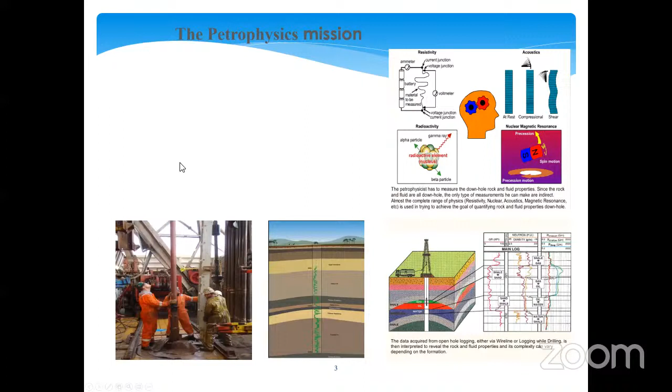So if you want to be a petrophysicist, or you're already in the business, this will be a refresher for you. For those who do not have an idea, the mission of petrophysics is to identify and quantify hydrocarbon resources in the subsurface, and also to be able to know the kind of fluid type we have, and then dealing with the rock and fluid properties in the formation.

Now, we do this over the life cycle of the field. So that's the objective of petrophysics. Because we cannot access our hydrocarbon directly, we do not have the intellect to go subsurface, we have to lower downhole tools, like you can see from what you have on the screen.

So we can only lower tools into the bottom hole. When you lower the tools into the bottom hole, it's going to send you some inferred data. These inferred data are then presented in log form. It is the responsibility of the petrophysicist to do the evaluation.

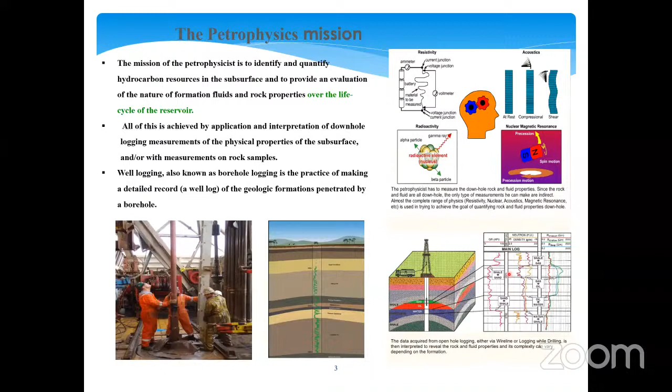And in doing all this, there are specific kinds of data in general context that we look at. That leads us to the fundamentals of petrophysics. What are the specific data that we are looking out for in general?

We want to assess the mud log. We do this in integration with the geologists on the wellsite. We also have core analysis on the wellsite, who also collaborate and then deliver value.

Open hole logs are taken as at when the well is being drilled. It is the role of the petrophysicist to do the interpretations and to be able to give value to the operating company or to the asset owner.

Now, in this context for today, we'll be talking more around when the well has been completed and when production has already begun. So I'll be talking more around cased hole logs, about production, how we manage our production, how we can deliver, and how we can extend the life of our producing assets.

So in a nutshell, for the basics, what are we looking at?

We're looking at the contacts and then the saturation. Do we have oil water contact, gas water contact, or gas oil contact? These are the things to look at. What is the value for our saturations at initial condition? And after we have produced our reservoir with time, what are we seeing as a saturation number? Is it declining or does it remain at original? These are the scenarios we play around.

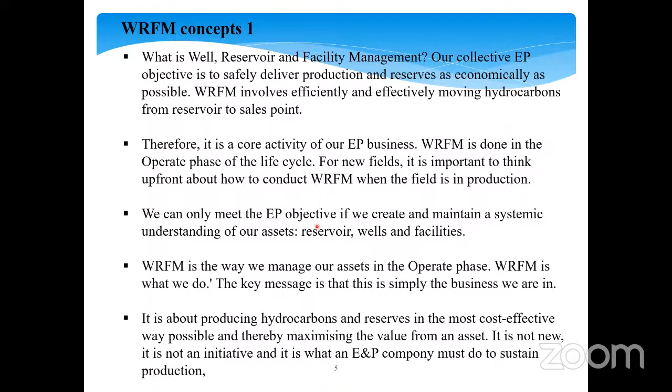So in doing this, we must look at cost-effective manner as much as possible in maximizing our assets. So it is not a new idea, not a new initiative. It is what companies must do to sustain production. Why do we have to sustain production? If you do not manage your production, you are likely going to be out of business and you will go bankrupt.

You've gotten the reservoir, you put your facilities in place, and you projected for maybe 100 years production, 50 years production, 30 years production, based on your forecast. You want to ensure continuous production. It will then mean that your well, your reservoir, your facility needs to be built into your general understanding and concepts in order to form an uninterrupted flow. So we need to build a general understanding of how our reservoir and wells, as well as our facilities, are going to perform.

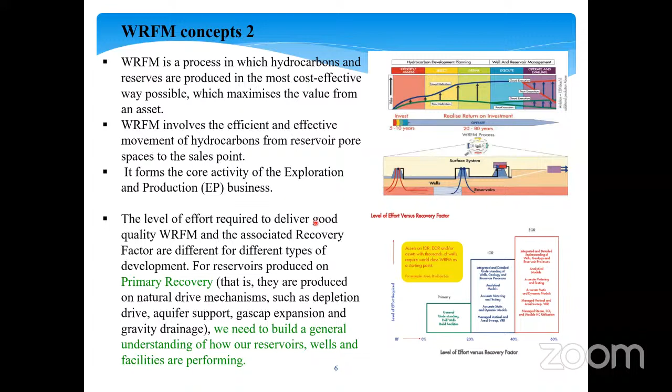You need to know your subsurface pressure. You need to know your surface pressure, your inlet pressure, your outlet pressure. What's happening in your aquifer, and what challenges you encounter. You cannot do this without getting or acquiring the needed data in a continuous manner or in a lapse time manner. That is where petrophysics has a significant role to play.

So playing back a little, from when you start your exploration, you start putting in money into a project. As you put in money, you are acquiring data. You are estimating your volume. You are appraising your field using data. When you start your production, you want to have a payout, and also for further development purposes, because you want to extend the life of your field.

What does the petrophysicist do? We continue to acquire data. We have our initial field development plan based on known data. As you begin to produce, the dynamics - what you know at initial, from initial data - things could begin to change. It then becomes necessary to continue to manage a health check on your well, on your reservoir, as well as other facilities in your integrated system, up until when you get to the abandonment phase. It is in line with this that we build a static model.

So we have a first-hand understanding. We then built a dynamic model. What do we need to build the dynamic model? From our static model, we have initial open hole log data that we use to derive petrophysical properties, which are imputed into our reservoir model. Thereafter, we go into dynamic model. What kind of tools do we need to be able to acquire the information to manage our reservoir? At that point, we are into dynamic model.

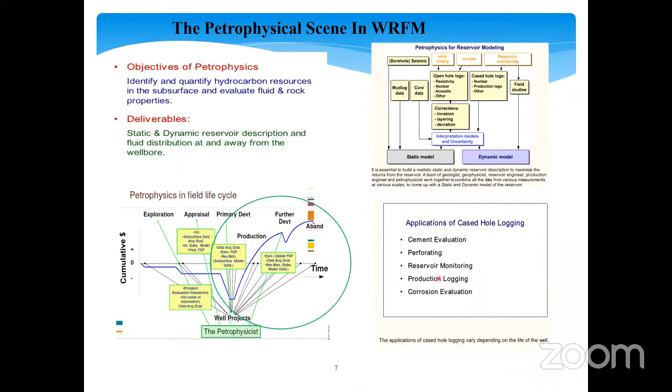In building this model, you don't work in a silo, you work in an integrated team with other technical professionals. So some of the things I'll be talking about in this presentation include cement evaluation, perforation, reservoir monitoring, production logging, and corrosion. These are part of the tools that petrophysicists use to manage our wells, manage our reservoir, and manage our facility, and they form the bedrock for our WRFM petrophysical data.

In WRFM, we are thinking about production, not just production. How do we continue to produce without deferment? How do we continue to add capacity to our facility so we don't have downtime? So the accuracy and understanding of our basic data is what will help us build a robust model that will last the test of time and continue to calibrate until we sweat out our assets.

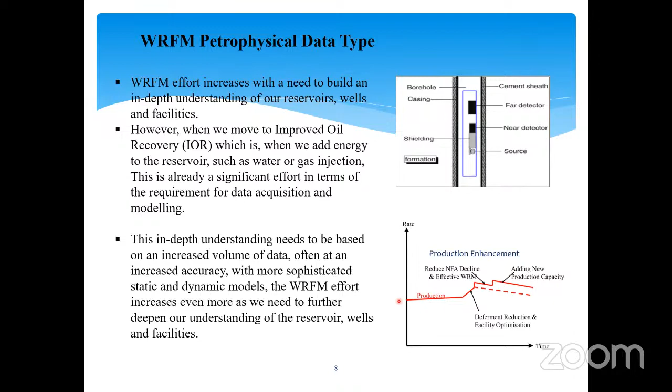Some of these tools and data we'll be acquiring are very basic, which I'm going to run through. I'll be talking about production logging, what it's meant for, and at what point do we deploy production tools. I'll also be talking about reservoir monitoring logs, cement evaluation, casing integrity, and of course geomechanical data.

Our subsurface is being challenged as we continue to produce. There will be loss in terms of pressure management of our reservoir. Of course, there could be slight chances that we could be having issues around subsidence and compaction. So in a nutshell, I'm going to talk around all this.

So we want to know our casing condition. Is our well still healthy? What is the reservoir condition? Are we producing H2S from the reservoir? If we are having H2S being produced, is it affecting our tubulars? If it's affecting our tubulars, the chances are that we'll be having corrosion. It then means that we need tools to monitor our wells.

Cement condition - have we done cement jobs in the past? Where are we today, and how effective was your previous cement work? Are we having issues around cement channeling? Are we having issues around hydrocarbon bypassing the point of production into a thief zone? Is the saturation being impacted on? What's the current lithology in our formation? Porosity - we also want to know our formation strength.

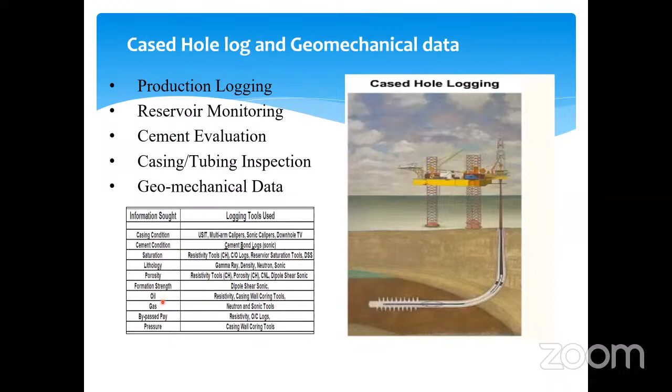Are we having our oil depleted, gas cap formation? All that is what we need to talk about in a nutshell, and then I will give you the opportunity to ask your question like I earlier said.

So production logging - why are we doing production logging? We are majorly concerned about what happened within the tubular. We want to be able to have a clear differentiation as fluid is coming into the tubular.

Based on forecast, are we having the required inlet and outlet from your wellhead? It could be that there is a no flow condition, possible low performance. It could also be that while you're expecting oil production, you're experiencing excess water production. It could also be that instead of gas production, you are experiencing water production, or in your reservoir that is targeted for oil production, you are experiencing high gas production. Where is the gas coming from? These are the things you'll be able to use production logs to assess.

What kind of fluid is flowing? Of course, that leads us to having capacitance. The capacitance of different fluids is different, so with that we'll be able to know the type of inflow. At what rate are we having this flow? Is it as predicted, or is there a change?

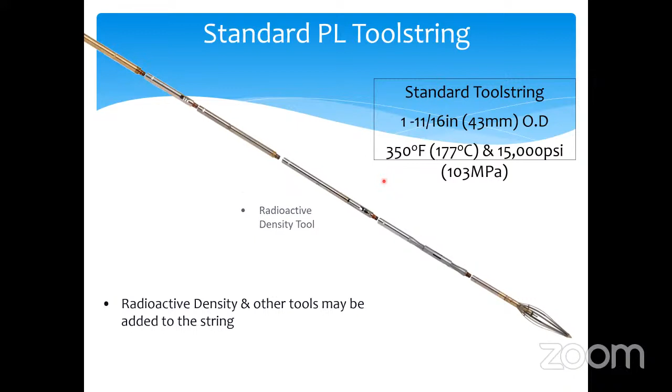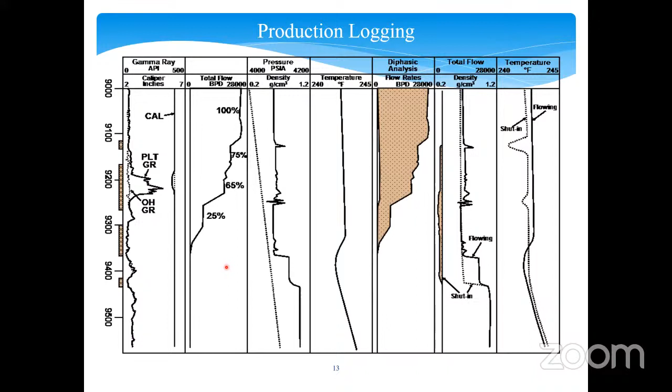Other tools can be added into our standard tools to achieve healthy results. This is just a play out from a production logging tool. We derive data such that we've done some perforations, and we continue to monitor production using the production logging tool, which gives us a clear indication of the percentage of fluid that comes in from different perforation inlets. It will also enable us to know the interval that is bringing in water for a possible shutout.

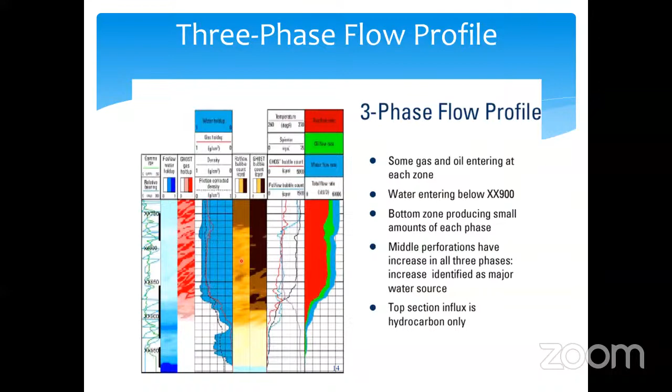This can also be monitored in a three-phase dimension, such that it could tell us the kind of fluid production, oil, water, or gas, and at what ratio they are being produced.

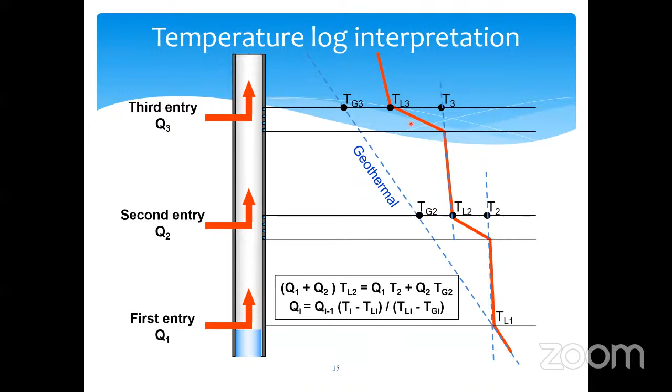Other tools that we use to monitor our well, embedded into the production tool, is the temperature log. Temperature variation is supposed to be geothermal, meaning increasing with depth. Points where there is a deviation from the original geothermal gradient is an indication that there is an inlet of fluid. So these points can be noted as intervals where there is a possible leak and a possible remedial action, right?

I take you also to another tool that we deploy as Petrophysics in managing our wells and reservoir: the reservoir monitoring logs. From initial production, you begin to produce your well dry, meaning you are producing dry crude. Over time, you begin to monitor your well and discover that water has begun to rise against initial expectation. Where is this water coming from? You cannot go into the well, so it is then expected that we run some tools. These tools are being run.

High energy neutrons are pulsed into the formation. Depending on the type of formation, if it is highly saline, we deploy the pulse neutron capture. And when we have very low salinity, we deploy the pulse neutron spectroscopy, otherwise known as carbon oxygen log.

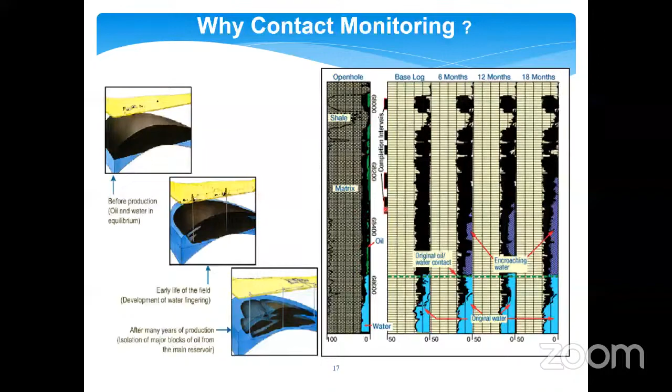This is a typical case of our reservoir under initial condition. Over the years, as production continues, in early life of the well, we begin to see depleted zones and non-depleted zones. The question is, if you have your perforation at the depleted interval, it then becomes imperative to have a change in your point of opening into the formation in order to cut down the water inflow into your well. It is part of what we do.

Don't forget, what you take into account is what is the average cost of a well today. If you know the average cost of a well, you will then know the value in maximizing production through that well that has been drilled and completed.

Other things we don't want to play about is our cement evaluation. We do our cement evaluation to be able to secure our well and ensure that it is integral, because we do not want hydrocarbon to come to the surface outside the conduit that we have prepared. So to reduce this risk of unintentional release of hydrocarbon to surface as low as reasonably practicable, we do very serious cement evaluation and ensure that our cement work is integral.

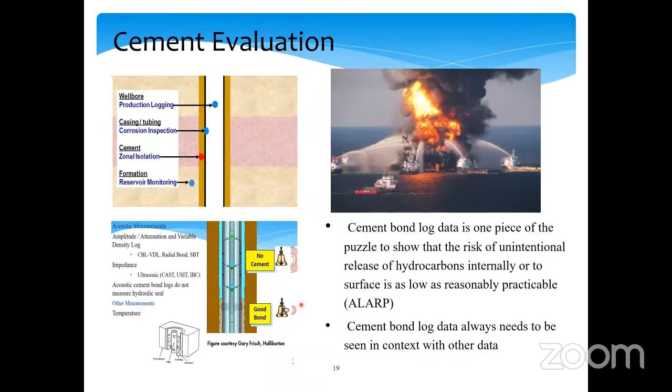I will not labor you much about how the CBL operates. They are in different modes and different kinds. It's just a case of looking at cement evaluation. If you have a bad cement bond, the amplitude between the well will be high, meaning that there is no cement, right? And when the cement is okay, is good, it has served the purpose of isolation. It will give a very low amplitude, indicated with what you're seeing.

So there are other objectives for the cement, which I've just highlighted. The most important thing is that we want to ensure that we do further drilling when drilling, and then of course manage our production effectively. Of course, you have your production tubing, right?

And if that pipe is in place, you do not want the pipe to get bad. So you also need to be checking for corrosion. You do the cement and ensure that fluid from the formation is not having interaction with your tubing.

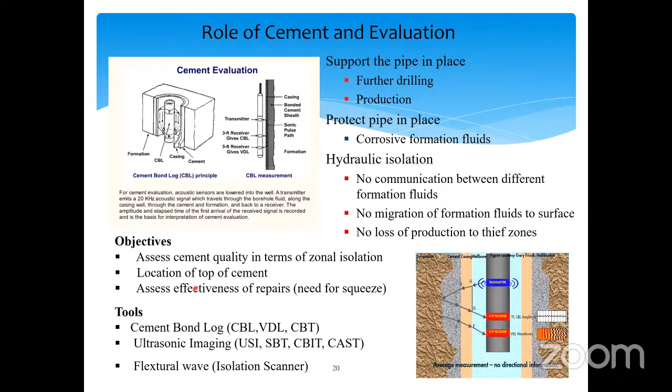It also helps to do hydraulic isolation, meaning fluid does not move from one zone to another. So the objective is zonal isolation. We want to locate the top of cement and all that. If this has changed over time as a result of temperature and pressure effects, we still have a solution. We can do what is called remedial squeeze and get things sorted out by isolating the zones that have been compromised as a result of change in formation.

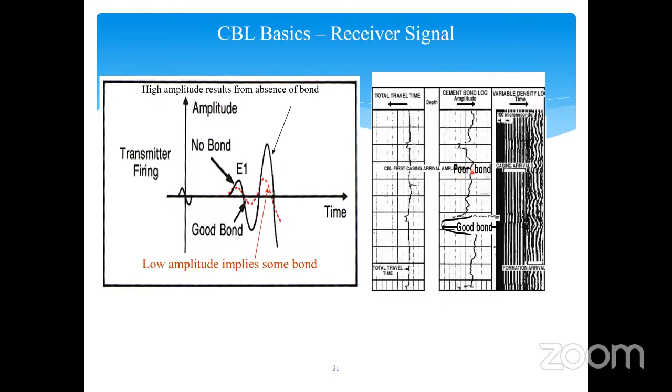So this is just a basic kind of log where you have a good bond because the amplitude is low, and it's the old vintage log. Then you have a poor bond when the amplitude is high. In present time, we run this type of ultrasonic image tool such that it gives you a 360 degree radial image of your well. With that, you'll be able to determine the angle or the points that are not properly cemented.

You can see an indication of top of cement, good cement, where you have this brown patch. Complete brown patches are good zones that have been completely cemented. However, like I said earlier, if you have a case of bad cement work, we can still do remedial squeeze. This is a case of a bad cement work that was done.

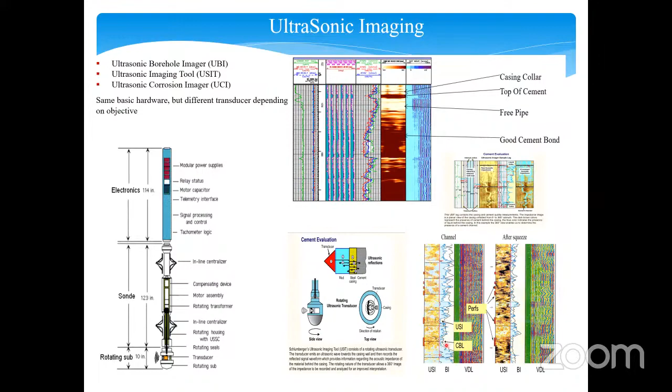The bond index is when a remedial cement work was done. So we also monitor corrosion. As petrophysicists, we monitor corrosion in our well.

If our wells are tubulars and even our pipes are corroded, maybe you've heard of non-destructive testing on pipelines. These are continuous checks that are being done to ensure that our pipes are integral.

Now, wireline evaluation. It is estimated that 1% of total operating costs of the petroleum industry could be saved by correct application of existing corrosion protection technology. So what do we do? Corrosion control is particularly cost-effective for deep or remote wells, those expected to have a long life, or for wells producing CO2 and H2S.

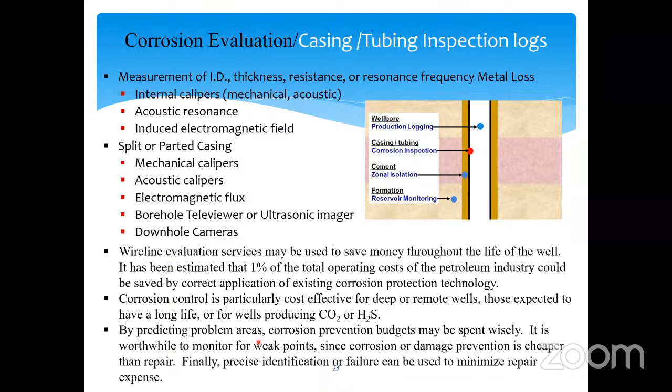So by predicting these problems around corrosion, we will be able to save the situation before we have a catastrophic failure. When we're able to identify failure, we can also minimize cost of repair. So this is what actually happens downhole.

You have your redox reaction actually taking place. You have part of your metal becoming the anode and the other one becoming the cathode, losing metal and gaining metal. These are not visible to the eyes, but our tool will tell us what is actually happening.

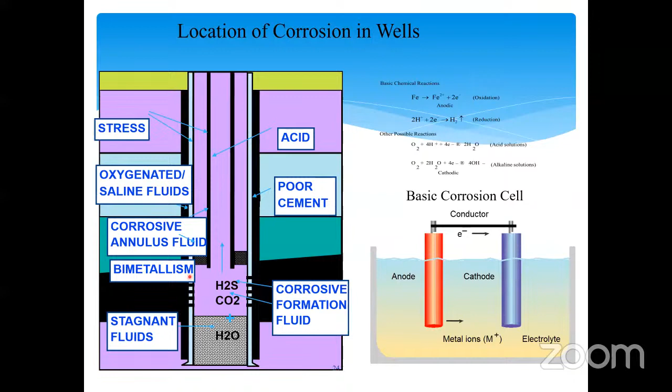From this schematic you see here, there is an attack of acid on our tubular. We have saline fluid, we have corrosive fluid, and we also have the effect of bimetallic change, meaning two metals increasing in temperature and pressure. They have different coefficients, which leads to different rates of expansion and contraction. So with that kind of activity taking place downhole, it could result in failure.

These are typical examples of failures that were detected by deploying petrophysical tools in our wells. This is a pipeline, or a tubular, that has actually been corroded. And here we have a case of catastrophic failure. If this was not detected early, it has already gone bad. But if this was not managed, of course, there will be spill in the environment.

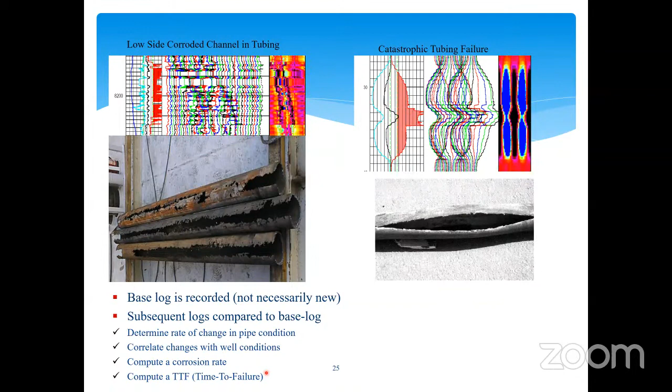So to avoid this type of situation, there is every need for us to have a base log data. And then subsequently, we acquire other logs at lapse time, program time, so we'll be able to determine the rate of failure and equally take measures to avert this type of situation.

So other cased hole logs that the petrophysicist acquires to be able to manage a reservoir are also like the cased hole formation testing, acquiring pressure data. We can also acquire resistivity log, density log, neutron log, all in a cased hole situation. There are also cases of monitoring subsidence.

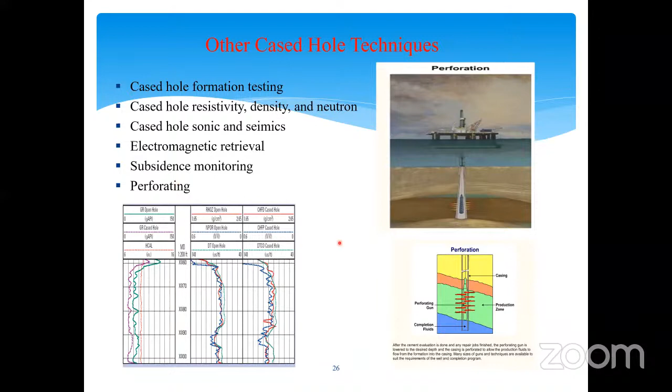I'll talk about that. And of course, if in the course of managing a reservoir we discover that there is an opportunity to enhance production, it is the role of the petrophysicist to determine the point at which we're going to carry out those perforation activities in order to gain more oil into the tank. So part of the solution that the petrophysicist provides is a geomechanical solution.

As you keep depleting your reservoir, there are chances that we'll have subsidence. We could also have some fault reactivation. There are places where they do water flooding and also produced water injection.

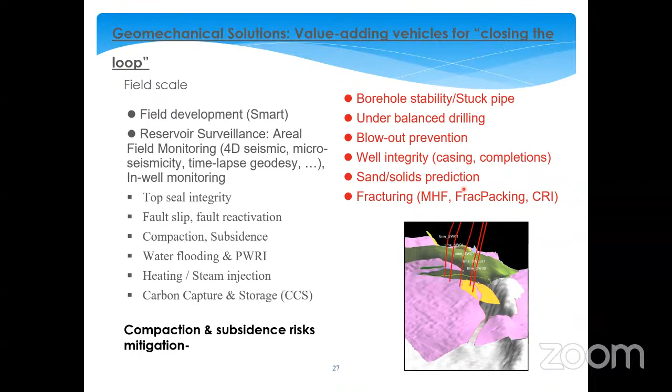We need to build models to have a good handle of our formation behavior and advise on modalities. We are not interested in producing oil alone; we are also interested in safeguarding our environment. So these are some of the roles that petrophysicists play in ensuring that we continue to optimize production.

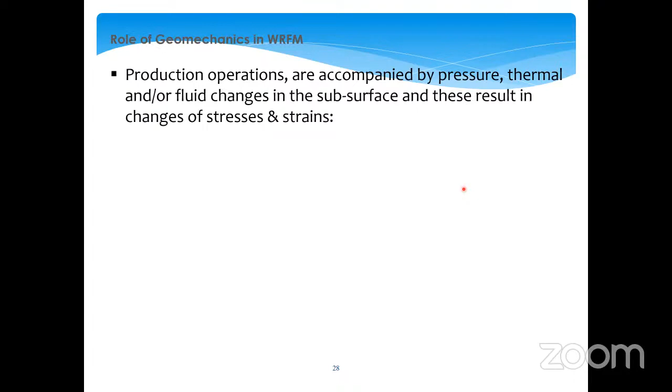Production operations are accompanied by pressure, thermal and fluid changes in the subsurface, and this results in changes of stress and strain. It then means we need to acquire data to know what the stress of the formation is and what the strain looks like.

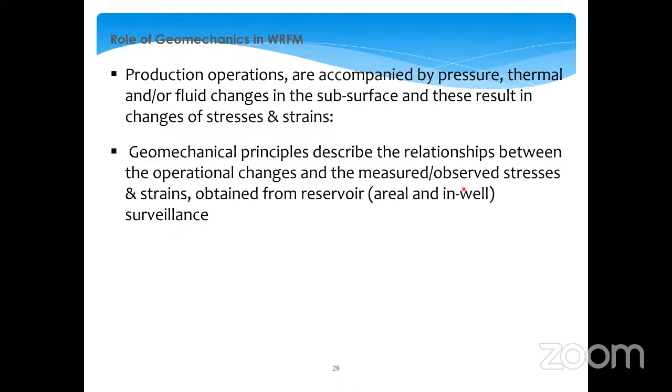These changes can only be monitored if we have good surveillance practice of acquiring data. So in conclusion, I would like to define the kind of integration in carrying out our WRFM practices that the petrophysicist does - what are the deliverables, the results, and the reward.

So here is the guy, the petrophysicist. He is a petroleum engineer. He relates with the well engineer, the drilling engineer, and the production guy. We carry out rigless well intervention activity and define the scope of how that activity will look, because the petrophysicist is the custodian of the log.

We also relate with the IT, information technology department. Of course the logs are stored in a database, so we need some IT applications to manage the logs. In terms of evaluating our logs, we also have some applications.

For example, we have TechLog projects. If you know, Cypher Crescent, for example, uses CEPAL, right? And also there are information sources that we can get. So we relate with the information technology team. Of course, there are many contracting firms involved in working with the petrophysicists - Baker Hughes, Halliburton, Schlumberger, and many others, right?

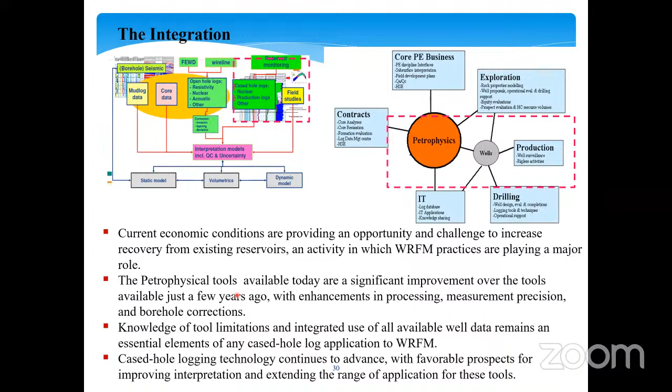So that is where we are. We continue to interpret and advance the course of our prospect by improving data in managing our dynamic model. The deliverables are quite enormous.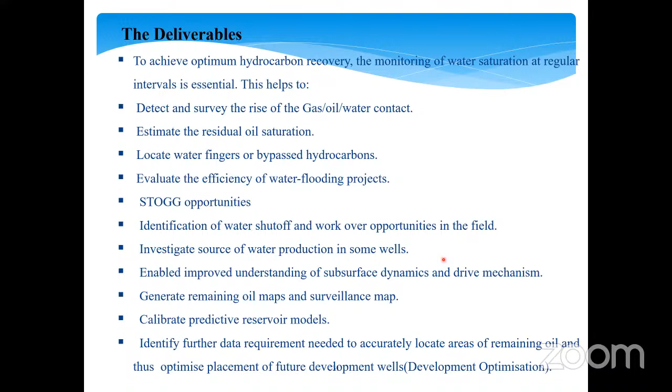Just to mention a few: it will help us identify, from all the data gathered across all these tools we deploy, some short-term oil or gas gain opportunities. It will enable us to determine if our well is due for workover. It also helps us know our source of water production and have a good understanding of our subsurface dynamics as well as our drive mechanism. It will also help us calibrate our predictive models.

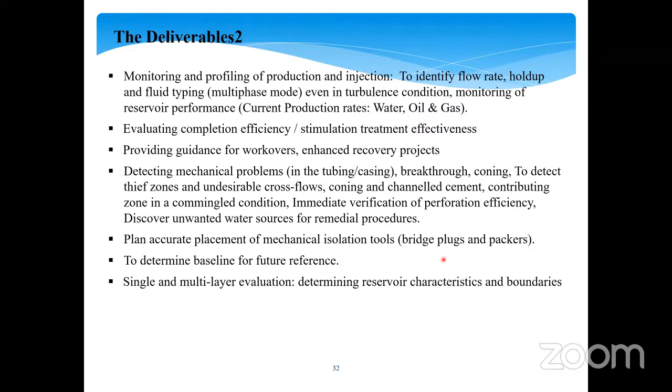Other situations it will help us address are well challenges and mechanical issues around our well - what is our production efficiency, do we have a thief zone in our well, do we have water coning or channeling around our cement? These are the kinds of things we address as petrophysicists in the WRFM space.

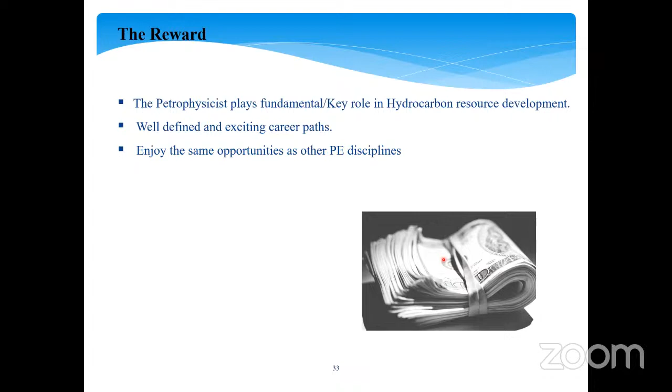Now, what is the reward? The petrophysicist plays a fundamental and key role in hydrocarbon resource development. It is an exciting, well-defined career path, and you enjoy the same opportunities as other petroleum engineers.